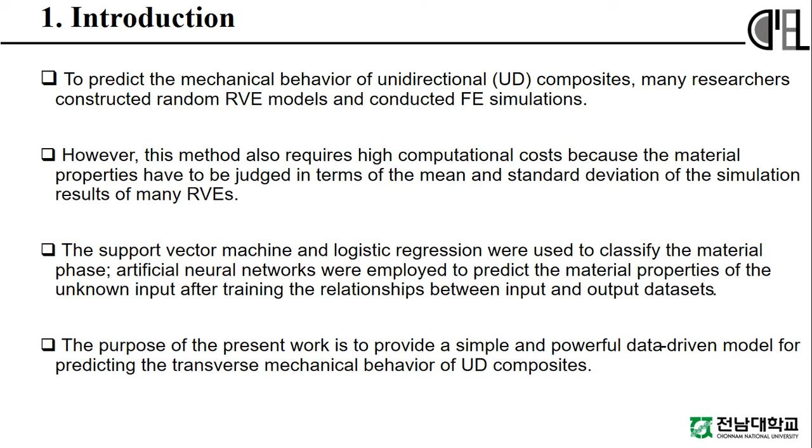The support vector machine and logistic regression were used to classify the material phase. Artificial neural networks were employed to predict the material properties of unknown input after training the relationship between input and output datasets. The purpose of the present work is to provide a simple and powerful data-driven model for predicting the transverse mechanical behavior of UD composites.

The CNN model was used with the input dataset consisting of microstructure images and the output dataset containing SS curves obtained from a transverse tensile simulation of RVEs of UD composite. The accuracy of the proposed model was confirmed by comparing the prediction results of several test datasets having random fiber positions with those of transverse tensile simulation.

It is noted that accurate prediction of the mechanical behavior was made within only a few seconds for the test dataset with the proposed CNN model, learned from the training dataset. The SS curve was predicted, including the entire material response, without principal component analysis.

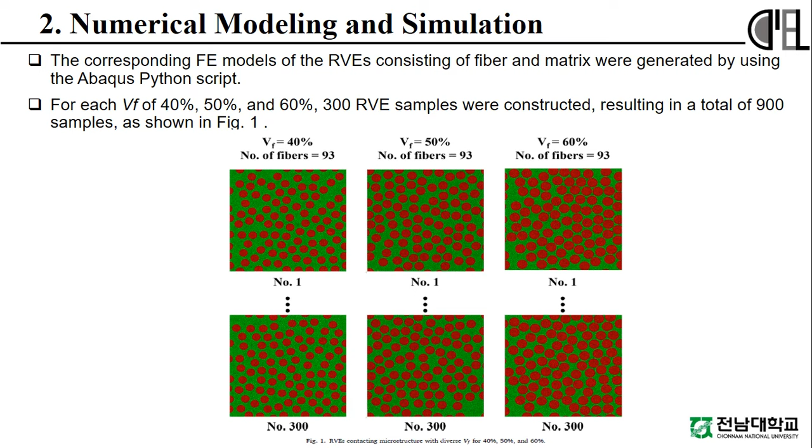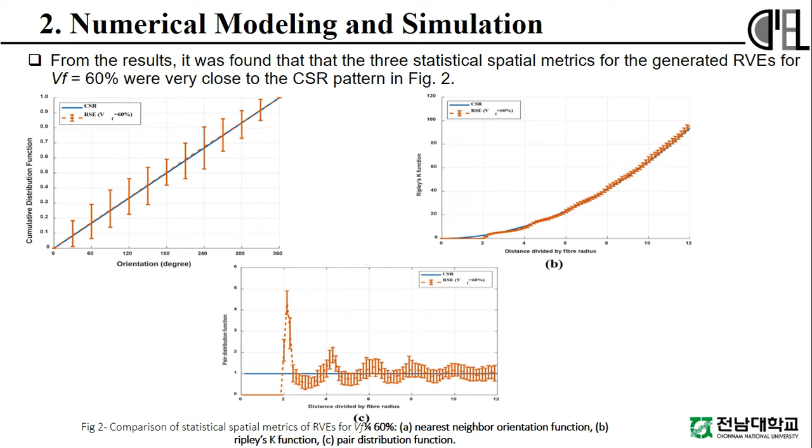Numerical modeling and simulation. The corresponding FE simulation RVEs consisting of fiber and matrix were generated using an Abaqus Python script. For each Vf of 40%, 50% and 60%, 300 samples were constructed, resulting in a total of 900 samples, as shown in the figure. From the results, it was found that the three statistical spatial metrics for the generated RVEs of 60% are very close to the CSR pattern.

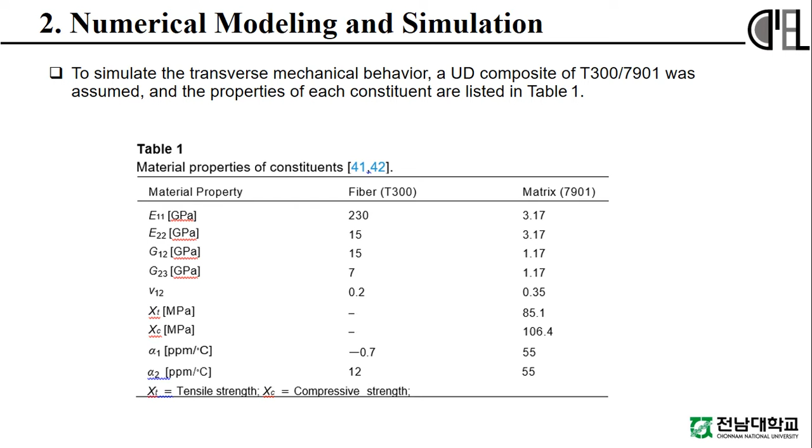To simulate the transverse mechanical behavior, a UD composite of T300 and 7901 was assumed. The properties of each constituent are listed in Table 1. In an actual transverse tensile test of UD composite materials, a debonding phenomenon occurs where the fibers and matrix are separated, which affects the transverse mechanical behavior.

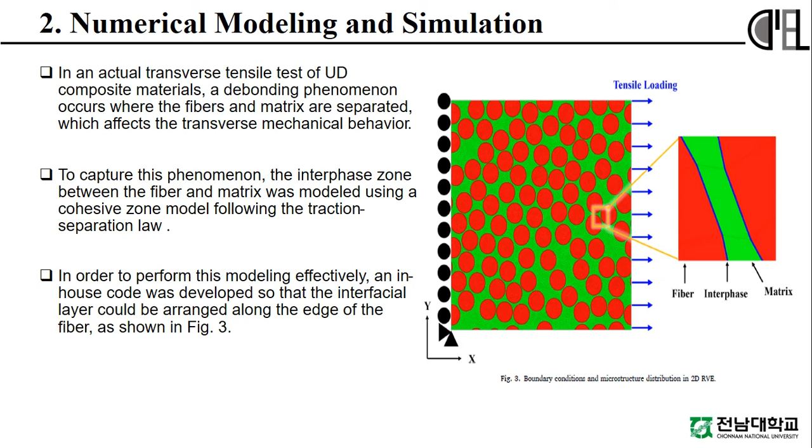To capture the phenomenon, the interphase zone between the fiber and matrix was modeled using a cohesive zone model following the traction separation law. In order to perform this modeling effectively, an in-house code was developed so that the interfacial layer could be arranged along the edge of the fiber.

A transverse tensile simulation was then conducted by imposing the periodic boundary condition on the RVE with Abaqus Standard. All the transverse tensile simulation results of SS curves with generated RVEs are plotted in Figure 4.

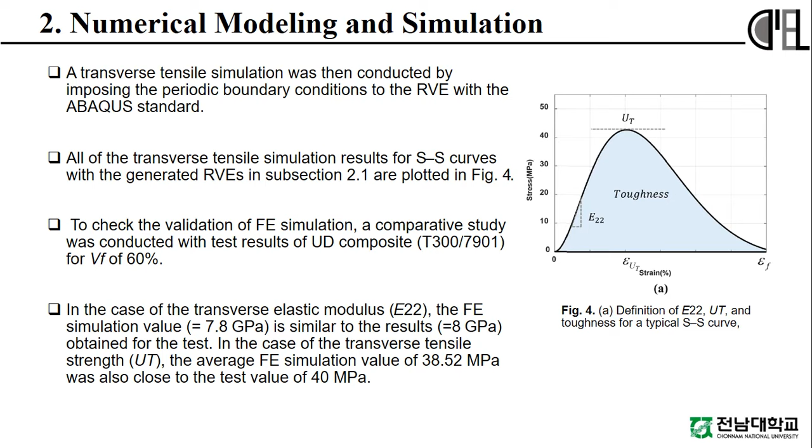To check the validity of the FE simulation, a comparative study was conducted with test results of UD composite of Vf 60%. In case of transverse elastic modulus, the FE simulation value is similar to the result obtained from the test. As Vf increased, E22 increased, and UTS slightly decreased due to increased stress concentration in the fiber.

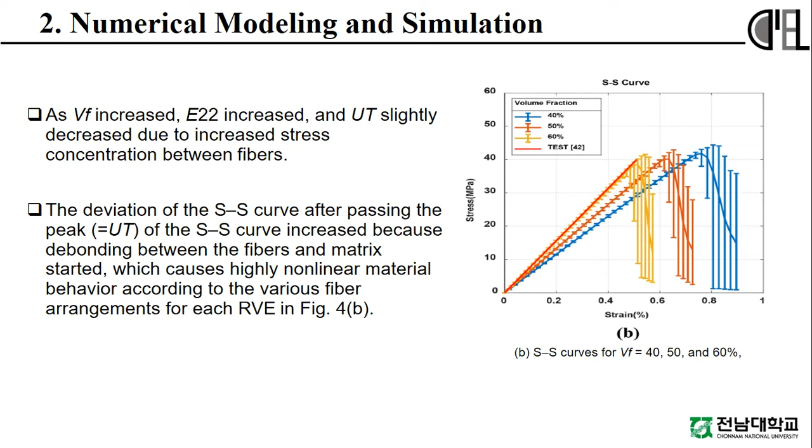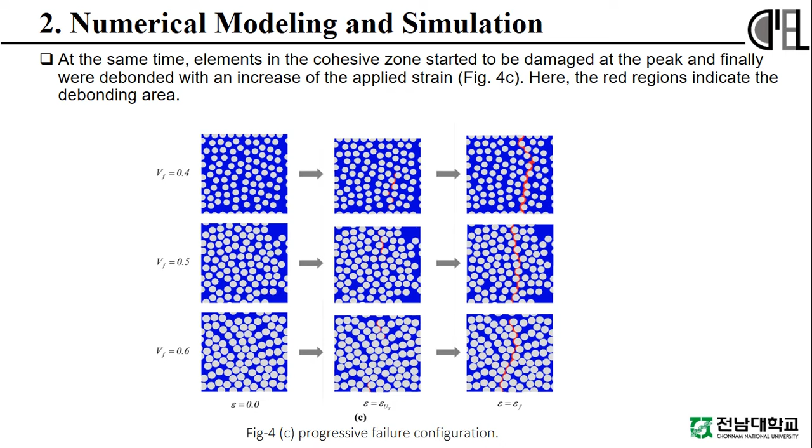The deviation of the SS curve after passing the peak increased because debonding between the fiber and matrix started, which causes highly nonlinear material behavior according to the various fiber arrangements of each RVE. At the same time, elements in the cohesive zone started to be damaged at the peak and finally were debonded with an increase of applied strain. Here the red region indicates the debonding areas.

The employed CNN model consists of one input layer, one output layer, one or more convolutional and pooling layers, and a fully connected layer. 900 images in total were inserted into the input layer and filtered through a convolutional layer to extract appropriate features. Corresponding SS curves, divided into 40 even stress and strain points for each SS curve, were used as output datasets for training the CNN model.

The convolutional layer using a 3 by 3 filter outputs a feature map that emphasizes the area of the image by using convolution of weights defined in the image, and it is transmitted to the next layer with its value as an activation function. The result of the convolution layer can be transmitted to the next layer by downsampling. The pooling includes max pooling using a 2 by 2 filter, which displays the maximum value in the specified kernel window size.